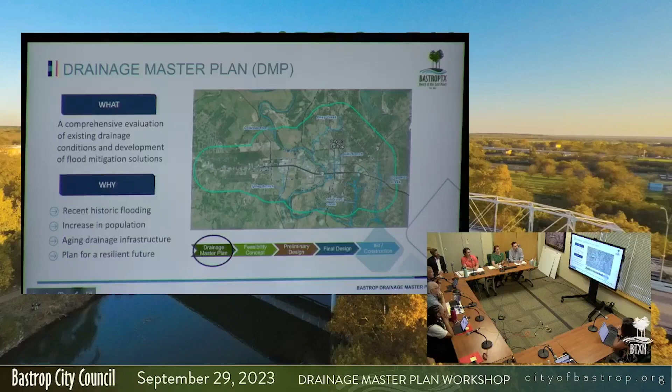I wanted to briefly talk about each of these stages in more detail. We started off, as Fabiola mentioned, in January of 2022, and that really started with data collection. One big effort we completed as part of the DMP was establishing survey for all storm drain infrastructure within the city. This is the foundation for understanding what is in the ground for stormwater, so we have a database that helps quantify and spatially ground truth what storm drains are in the ground.

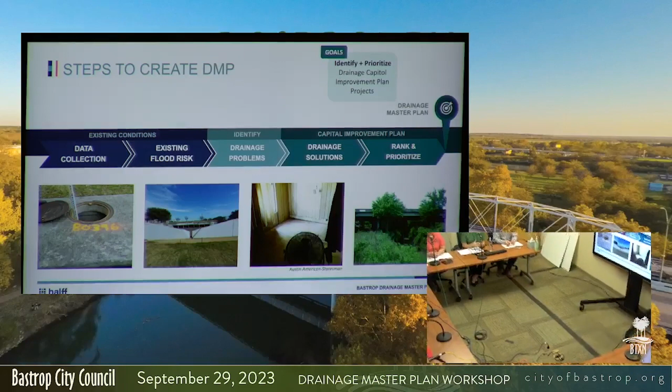With that, we did a flood risk assessment for existing conditions, which led us to identify what those drainage problems are. One of the big goals of a DMP is to identify where we think people are experiencing the most flood risk and flood problems, and then move into having a solution for how we can reduce that risk.

And that's when we move into those CIPs, capital improvement plans.

These are actual pictures of Bastrop from the Statesman. This one was after the Gills Branch flood. I found some photos taken by Halff on field reconnaissance, and this one as well, in Piney Creek. This is SH-95.

Once we identified the solutions, we also did a cost analysis to know how much funding it would take to implement them. With that, we were able to rank and prioritize them, which gives a stepping stone for the city to use in the future to continue investing in their storm drain infrastructure.

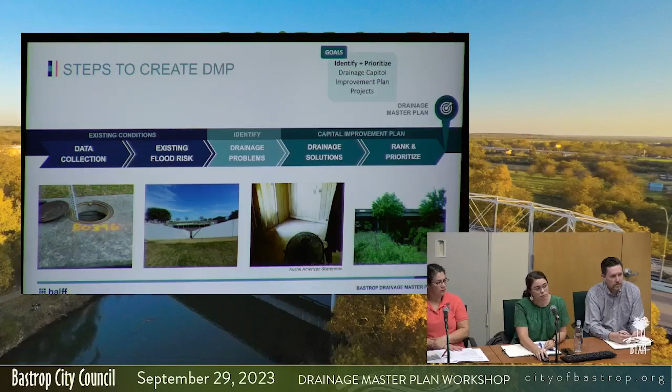We evaluated things such as structure flooding, if a home or property is impacted, and street flooding, knowing which streets are passable or cause danger to traffic during storms, as well as what people are experiencing, like drainage at their front door or window. We looked at all these components, and overlaid all the data for flood risk areas we had collected.

With this population of data, spatially we're able to ground truth the results we were seeing in our models. Just a couple things I wanted to note.

When we kicked off the project, we worked closely with the city to know what known areas were of risk and concern, the locations that people commonly call in for. We also used the resident questionnaire, which we did right after our public meeting at the beginning. We're only showing questionnaire results where a resident reported flooding in their response.

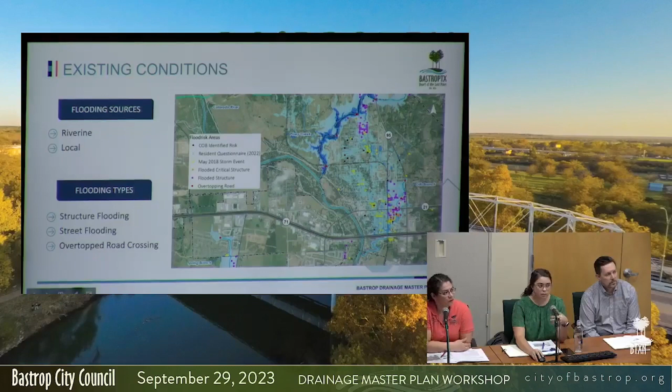Another thing we looked at was the May 2018 storm event. The city of Bastrop collected a lot of good data on which properties reported flooding, and we were able to populate that if a structure was reported as damaged and therefore a loss. All these things helped ground truth what the results were saying as far as risk within downtown or for the city of Bastrop.

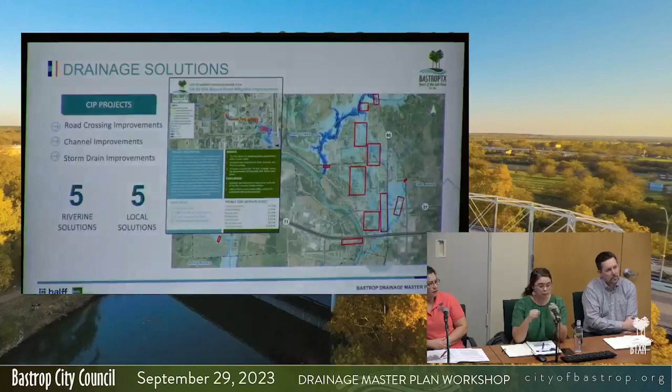One thing in the map you saw, the city of Bastrop had a lot of flooding showing as risk, which was populated by a 2D rapid assessment.

So that's really just a rain-on-mesh simulation where we take rainfall, put it on a surface, and watch the overland patterns of flow through the modeling. This is really just to see how flow behaves once rain begins.

I had a video here. This is Gills Branch in downtown Bastrop. You can kind of see, especially through here, this is a very flat area, so it does have a tendency to flow all the way down here, moving towards this culvert at SH 71 to the south. So it's just a lot of ponding.

Similar to Gills Branch, as you guys are aware, it does overflow. But even with the overflows from the actual riverine, local flooding does pond where naturally that railroad is a little higher ground. So this was a good indicator of what those general flow patterns look like.

With that, we were able to identify 16 of what we considered flooding hotspots, or more concentrated flow, to be able to discuss with the city. And with that, we were able to talk about which ones we think would be the best areas to pursue potential solutions.

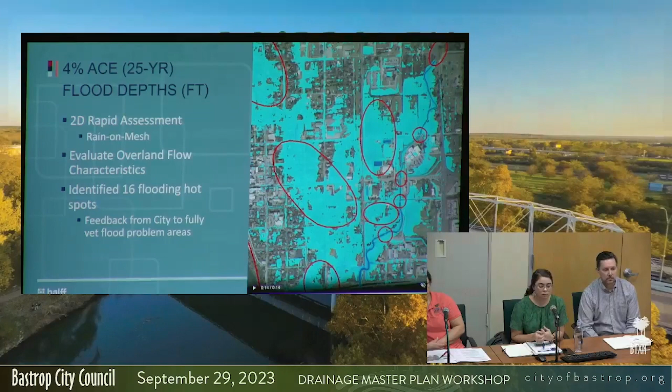So the changes to the drainage rules that happened post flood event, post large event, do have more stringent requirements in the Gills Branch area. The city did approve some, so you do have to mitigate. I'm gonna just tell you guys, this does not take into account B3 density or impervious cover, so if you think it's blue now...

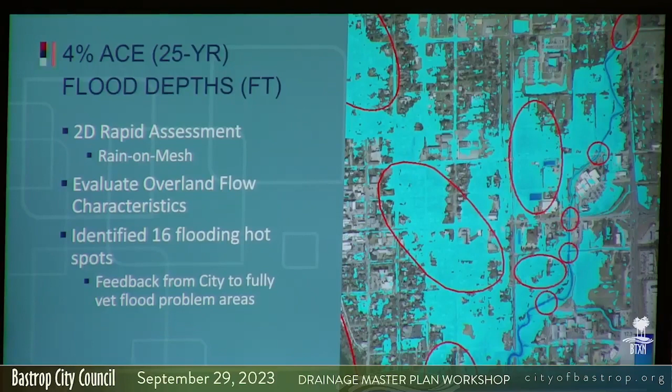So I had a couple of questions, if you don't mind — could you go back a couple of slides to the one with that one? Yeah, good deal.

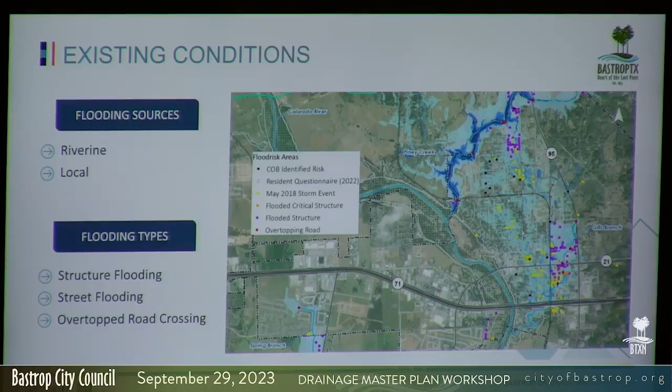And the latest FEMA report — wasn't it adopted in 2019 or 2020?

Okay, and the only reason I'm asking is because I've been here through 2 or maybe 3 of the big flood events, and I know we didn't do a very good job of maintaining the drainage ditches and pathways out of here. I think that's what caused a lot of the evaluation that was done, because things were clogged up, and so the water came up and people got stuff in their houses because of lack of maintenance. One of those pictures you showed of the Highway 95 crossing was a very good example of not maintaining the drainage ditches coming out and getting the water out of here.

So I'm just curious — the data you've got, where did it stop? What year did it stop at? Or do you have any idea?

As far as the data, all data is to date. I guess basically land use was existing — when we started the project, we evaluated the land use as existing conditions. Rainfall would be the latest and most commonly used in our industry right now, which would be the Atlas 14, released in 2019. So actually the effective maps on FEMA's National Flood Hazard Layer are accounting for Atlas 14 rainfall.

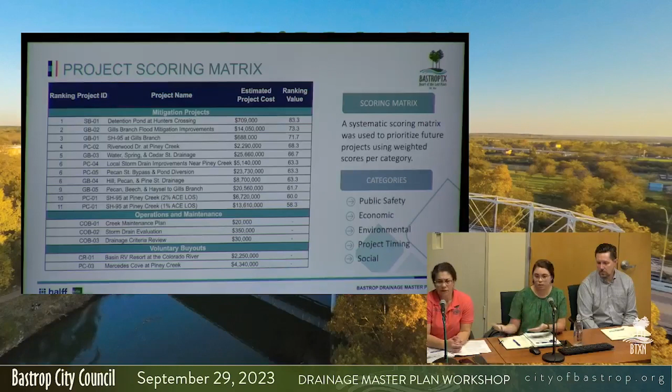Otherwise, I would say that all of them relatively stand alone, but locally drainage-wise, each of these right now is relatively connected and has one to two outfalls. So it would probably be necessary for the city to look at that systematically, starting on the downstream end and then working your way upstream. Another thing we didn't do in this list, but we could phase that out, so it's not something you'd have to address all at one time. You could do certain blocks and or streets as they advance on the transportation side or public works. So there is opportunity to approach those in many different ways. But we tried to write in the plan too, if one would need to occur for the other to see benefit, and that would probably be for a lot of the storm drain projects. They do influence each other.

Are you going to go through each one of those 11 items? No, I was not. Okay, good, because I was going to ask a couple of questions if you're going to go through a bunch of them. So the first one is actually probably the most current construction that we've had, right? Hunter's Crossing, all the other stuff is old, has been here for 100 years. Hunter's Crossing is the newest one, and that's number one on the list.

As we're bringing stuff on, because that's also where all our development is, it's all coming to that piece, and maybe that's why it scored number 1.

Is that detention pond creating a new pond at Hunter's Crossing, or making the ponds that are there deeper, or a combination? We did look at that. Right now, with the structure in place, the weir does see overflow at Hunter's Crossing. So we looked at resizing the weir structure to help flow pass through a little faster, and therefore mitigate that road crossing. We did look at adding volume to the pond itself.

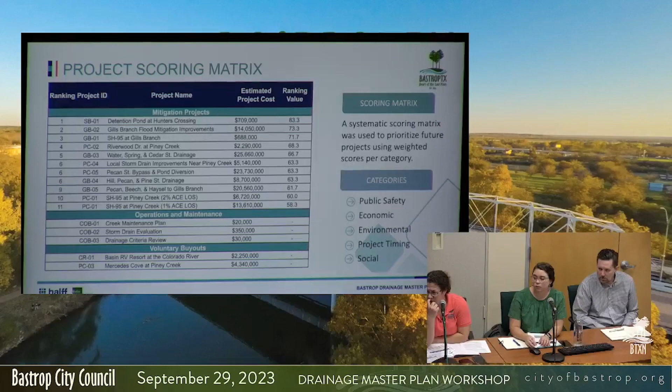Because I think a lot of that water too, and Fabiola, maybe you can help me with this, doesn't it come from the detention pond at Burleson Crossing and then go across the highway? Or am I wrong with that? I don't think so. I think the detention pond at Hunter's Crossing is just to address the flooding issues at Hunter's Crossing, right? Correct. Okay, I thought they were connected. Burleson Crossing detention pond was creating issues going across the highway, but I could be totally mistaken with that.

But I think that being number one on the list, and knowing that's where all the development's going, we should try to fix that. It should be number one if that's where all the drainage is going.

Someone did already call and ask how we analyzed it. We did analyze it with existing conditions, so it does not account for any additional development that could be ongoing upstream of it. With that, we would have to probably reevaluate what that looks like at the crossing.

So that concern, since we're just talking existing, and Sylvia brought up future, do we need to study, amend, and look at parts of our B3 codes that could contribute even more to potential flooding? Are there places we should look at more closely in the B3 codes that could make this worse?

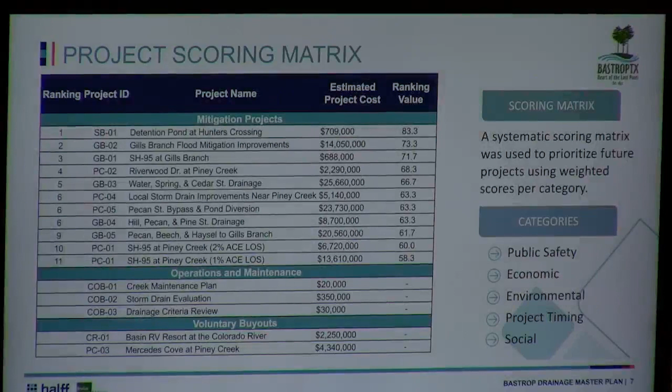The issue with Hunter's Crossing becomes they had capital impact fees as part of their public improvement district, and those commercial properties are paying the brunt of that. I don't know that they can sustain any more. And legally, if we can charge them anymore, they've already paid their fees and they paid to highest and best use back then, so they're sort of caught up. This is going to be our expense.

I had a question again on, and I'm glad you asked about the density and what we currently have now, so we definitely need to look at that as we're rewriting pieces of the code, what we're doing and creating more pavement and more impervious cover. On the Highway 95 piece, can you go back to the map again?

I guess that one will work. At where Gills Branch starts at 95, and that's all the, is it all the dark blue? Is dark blue Piney Creek? Oh, Gills, okay, right where your cursor is. So there's a lot of vacant land right there. So if there was a detention pond there at the beginning of all this water, where it's starting at the bottom of that hill, would that help? I doubt if you took that into your evaluation of everything, but would a retention at the beginning of all the water starting help with the downstream water?

So we actually had, not as part of the DMP, Halff has been involved pretty intimately with the Gills Branch watershed. So back in 2017, I think, was when we first did the FPP, that's the flood protection plan, and we evaluated both Piney and Gills Branch.

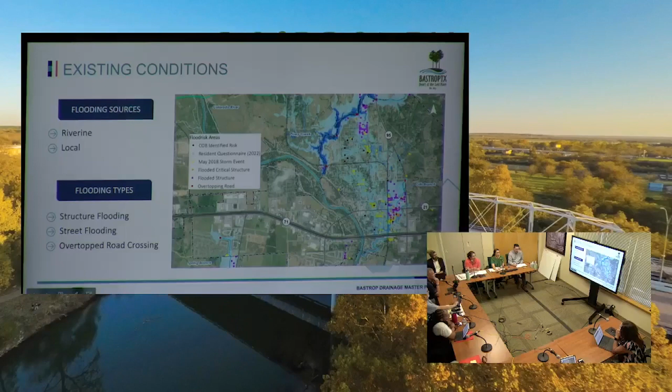I guess I'm not sure what metric I would want to use, but at the same time, I might want to look at additional metrics, like number of structures flooded, or some other way to look at it to see if there is another logical way to order it.

How would one get that data? Yes, it was part of our package, so let me know if you need that again. But essentially, you'll be able to see how each were weighted.

For example, public safety was weighted based on frequency of storm events and flooding risk impact. Similar to economic factors, there were just ranges. We could always change the criteria of what's being influenced or decreased, and change the values of those.

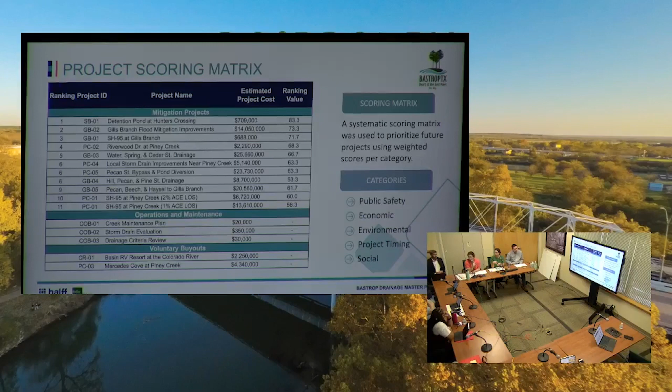When we were using the criteria, what we were trying to do is based on the International Institute of Asset Management, which uses the triple bottom line approach recommending safety, environmental and social, and economic value. We tried to use that as part of this project. The only thing we added was project timing, to see if we could combine with other projects.

I can't recall, but did that package also include information from the 2017 study and some of the recommendations from that study? No, we did not include that.

The master plan may mention it, but it didn't include the package on that study. If you want that, I could try to get it. I think it'd be nice for council to look at it and see what had been discussed before, and to make a determination of whether or not it's something we want to continue to consider, at least from a study standpoint.

And this email from Ann that you're referring to, we got one for this meeting that was just a copy of this presentation. Is there another one I'm missing? Yes, I thought she had sent it to you last week, the Drainage Master Plan report. It's on the shared drive, the council shared drive. I pulled it up this morning, yeah.

On your larger items up there, number 2, number 5, number 6, maybe number 9 too, there's multiple things identified that accumulate those costs, maybe 5 or 6 road crossings. I can use Chestnut Street as an example — this crossing was calling for bigger concrete structures to get water from one side of the road to the other.

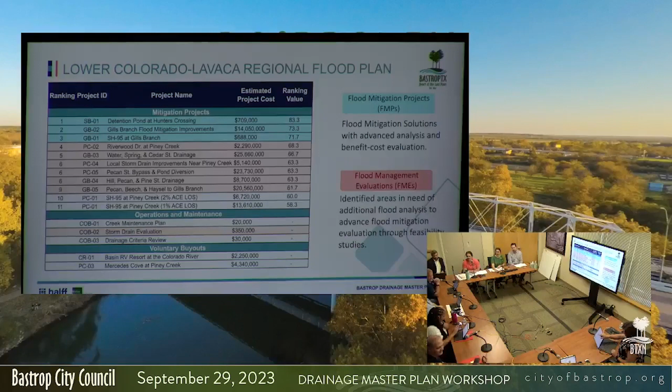Yes, so with that, we did want to take some time to talk about the drainage project. NewGen did a cost analysis to look over what potential funding would look like in the future.

All right, good evening, Mayor and Council. Matthew Garrett with NewGen Strategies and Solutions. I was able to present at your town hall eons ago, but NewGen's not a stranger to Bastrop. Chris Eckert has helped you with water and wastewater for some time, so I'm honored to be here in his place. I do a little more stormwater than he does nowadays. So you sort of saw $128 million worth of projects in '22 that we think are probably our problem.

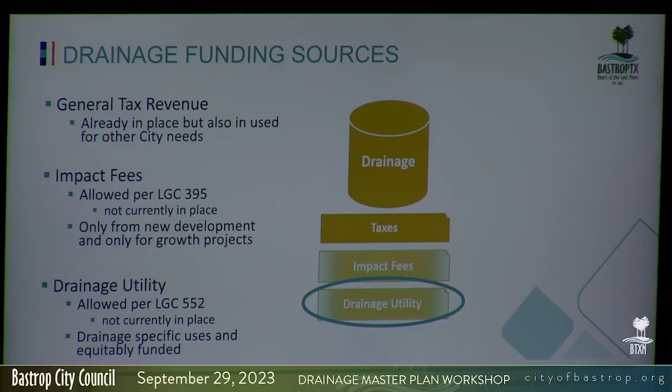It's under current conditions, and you now have a challenge of deciding prioritization, also how to fund it. You clearly have more than one means to fund this. The city coffers have a lot of channels coming into them, but generally those are general tax revenues.

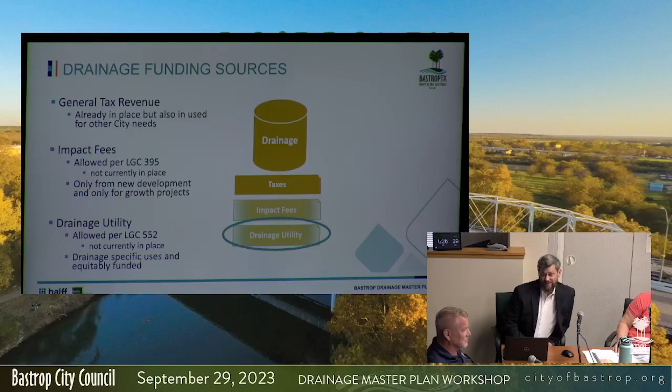You could do an impact fee on stormwater. It is eligible, though we haven't proposed that. Alternately, you could implement a drainage utility. That's allowed for under Texas Local Government Code 552. And so the cost of services that we included are all eligible. So it's governed not only by the statute that allows you to create this utility, but also what you spend the money on, so that the fee stays a fee and is put to those uses as an enterprise fund.

All right, so very simply, there are operation and maintenance expenses. I think we talked a little bit about vegetation at one of your major waterways already. Maintenance of your waterways can be very important and helps get the water where it needs to go. So there's an idea that you need to do more of that. Today, as I understand it, you have that being done through your streets department. So we were able to pull from staff the estimated work effort from that group that could be, not that it has to be, allocated or included in this potential utility.

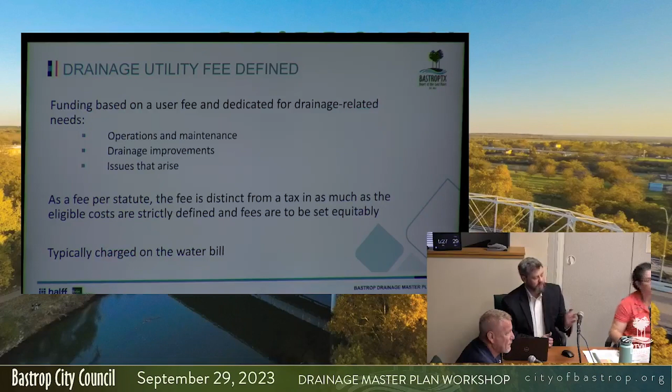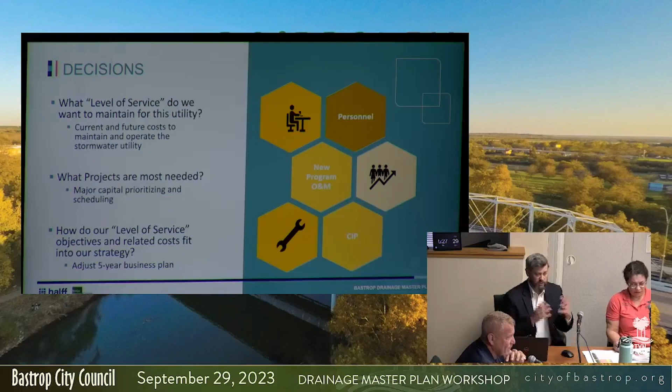Additionally, we have the drainage improvements, a pretty large stack of them there, $128 million to look at. And we looked at a couple other items related to additional maintenance needs in the future. So again, if you were only going to fund those capital projects, you have a big enough challenge, given either the current property tax limitations that you have on the city and the druthers of your residents.

Additionally, we looked at the existing personnel, we looked at those new programs, and we had to do a metered approach because there's no way, I believe, to put a tenable, even drainage fee out there that could fund a quarter of what you're doing in year one. So we understand that this is a big price tag, and that's going to have to be phased and funded over time.

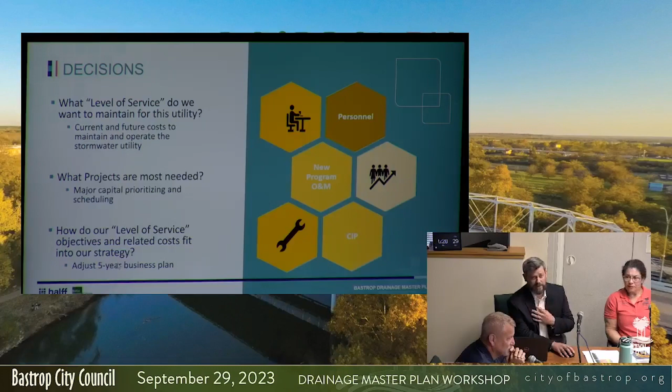So again, we can talk about adjusting the 5-year business plan. It's certainly not mine to set the course for your project priorities. But for the items that I had collected, and that's about 25% of your streets using the 2023 budget, it did have a small administrative overhead portion, which was about $40,000. These are all subject to inclusion or exclusion at your preference.

But if we included that and we included some additional staff, we have some professional services, because we're going to have these projects, we're going to need additional project management, I believe. Fabiola is the contract services we included in there. Additionally, there are some maintenance plans that should be put into place. There are some costs in setting those up. So those are baked in.

That is about $660,000. So the Halff team put together an impervious area analysis. That's how I came up with this up to $6 amount. This is based on your revenue potential, based on the residents and the impervious square footage of your commercial properties.

If we were to fund the capital, and you have this in the report, maybe an appendix on the shared drive, I believe, you'll see that we only got the first 2 projects for $10, because we had plus or minus 15, 16 million there. If I was to debt fund that, and my rule of thumb is $1 million of debt is about $75,000 a year, so if I'm going to generate enough to make those debt payments on a 20-year note, you would need about $10 to fund just those first 2 projects, if solely from this revenue source.

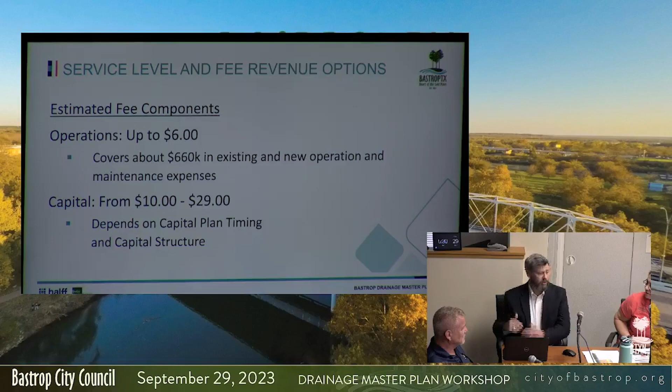So to answer your question, if we were to fund operations, this is a new conceptual utility, setting aside an enterprise fund, just like your water and sewer fund, with dedicated revenues and dedicated expenses. If you were to categorize a portion of your current streets budget and a small portion of your current administration budget, and add in a new project manager and another maintenance worker...

...you would have an annual budget of approximately $600,000. To fund that, with our known billing determinants, our ability to bill based on every home having a fee and commercial properties having their ratable fee, that would amount to about $6 a month.

And how did you determine which properties were eligible for this fee? The statute limits you to your city limits, with maybe a few exceptions for Edwards Aquifer Recharge Zone, but we didn't take that as an exception because that's your service area. Well, but it's not our water service area. No, sir, not at all. The Halff team looked against your appraisal district records for those in your taxing entity, and additionally, spatially, they took the footprint of city limits. I didn't do the GIS work, and I don't think we have that staff here tonight, but we did try to limit it to your potential billing area and wouldn't have extended beyond that.

So for people in another water service area that don't get water from the city of Bastrop but are inside the city limits, they would just have a bill for $6 a month for this. They could also pay annually - the City of Houston does annualized bills. They could do quarterly bills, and I think you have a solid waste service you could also use. This would be another line item potentially on their water bill, so you'd have maybe a small administrative service fee to those entities as a result.

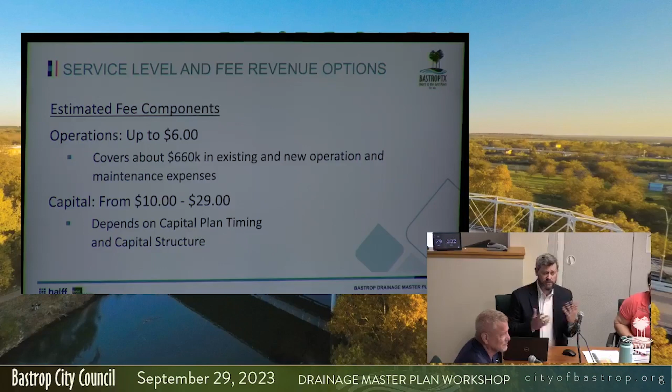And perhaps it wouldn't add anything to your current administrative service fee because it's just adding one more row, sort of a set it and forget it on every account. That's subject to, I guess, we didn't go that far - we're very early in feasibility, but great question. We understood we had a means to collect this revenue.

So again, that's $6 if we were to bake in everything I was given as an opportunity to include in this. And then for capital, another $10 to $29, potentially. Again, those are stretch numbers, I know, but we did have a big daunting CIP in front of us.

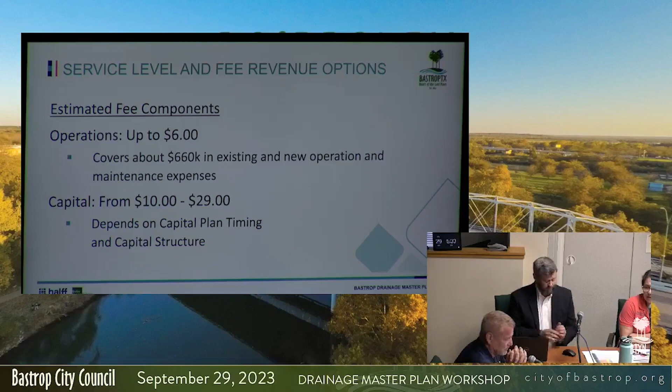And again, the master plan - no master plans I've worked on have assumed the staff is going to fix it all in one year. So that's not to say you should, certainly.

And ma'am, did you have a question? I do. So the $6 a month is only going to help us with existing maintenance and operations, right? Yes, yes ma'am. So in order to achieve the actual projects, is that $29 including the $6 or $29 on top? So that's another whole - $35 to get a third of the...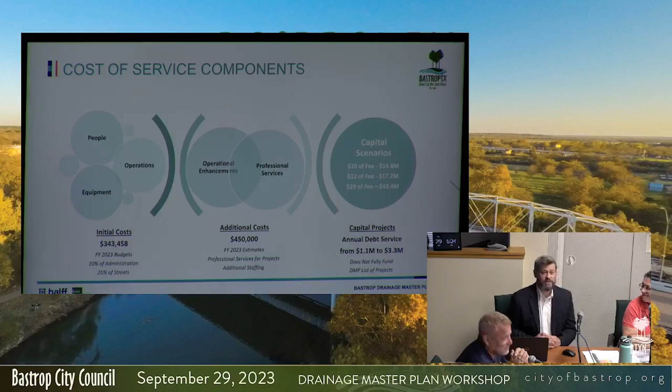Not a proposed solution, of course - this was feasibility. We would certainly look at comparators around you and talk about what is a reasonable figure for this, and I know you would all wrestle yourselves with that very question. Which is my point about development agreements that did not include annexation will now bite us in the butt for the next 20 years.

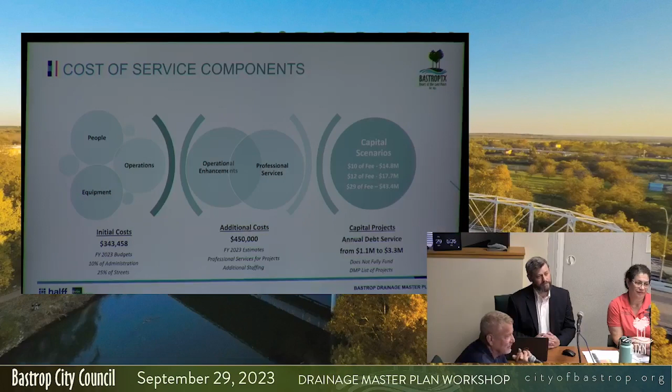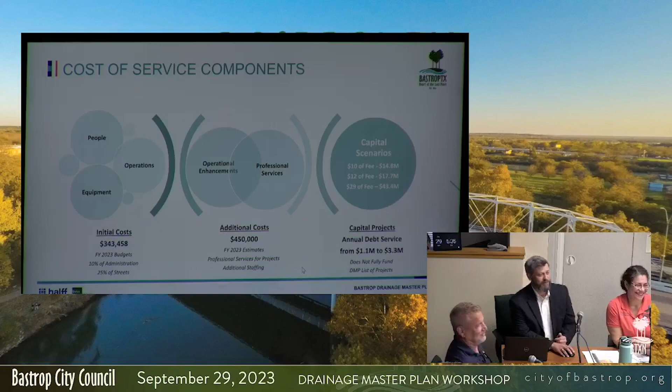I came in the middle of all this. Yeah, I feel your pain. I started my career in government, and I've been in city's shoes before. It's not fun - so, new challenges.

So this is really showing you, hopefully simply and visually, what a $10 component for capital alone would get you relative to those projects. Again, I just assumed the priority ranking as originally assigned, and you'll see that $12 of funding. The difficulty with debt funding is you do it and maybe you execute in 3 years, but for 17 more years you're paying that same note.

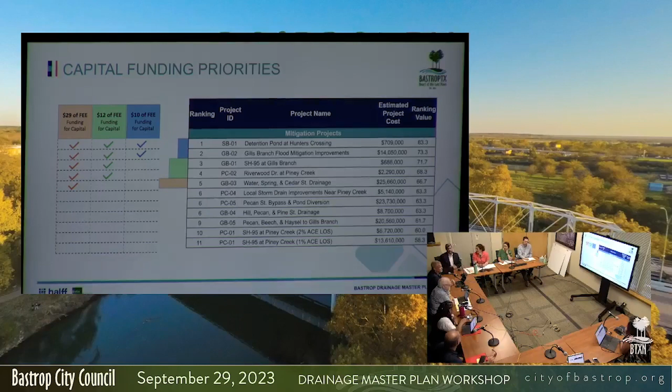And so you can't compound these and ultimately stack them on top of each other with stacking the relative revenue. Now, this doesn't assume a lot of funding or grant opportunities or developer matching. This is not a bleak forecast either. I think it's very realistic. If anything, it's a little shy, because as the gentleman pointed out, we haven't inflated these costs, and we've seen some substantial inflation. And Councilmember Lee, this

proposal is also a fee. It's not an impact fee to new development, the way you saw the transportation impact fee. And so we may want to do a combination of both of those things to keep the upward pressure off just the city limit residents, so that it includes all new developments as well.

My concern goes back to the same thing that my concern was for the impact fees. You were asking residents in those areas that have paid taxes for years, some for a lifetime, to now pay for the problem that the city's created, and for growth. We're having to pay now for growth. And it's a fee where we can't control the amount of rain, right?

And so a fee is usually you're paying a fee for some type of service. So my house may have far less impervious cover than my neighbor's house, but I've got to pay the same $29 they have to pay, and they're causing more of the problem. So where do you balance that out?

I had a friend the other day that called and asked to borrow $30. They needed $30 more to pay their rent, and that's $30 that they won't have to pay their rent. True story. So we're just nickel and diming our residents.

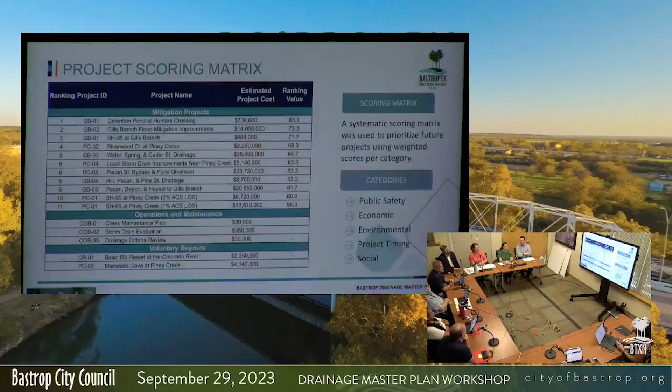Help me quantify like a 25-year or 100-year storm event. So, 10 inches of rain in one day, 20 inches of rain, help me quantify it in something that might make more sense. Well, we've also had 500-year floods in the past 10 years probably. It was designed for a 25-year flood event for some of the engineering, so I'm contemplating how much rain is that, over what period of time?

So you're quoting my memory now, it's Friday afternoon, guys. I would say, I think the 100-year - and it is in the DCM, or the storm manual - I think it's 12.4 inches in a 24-hour period is your max storm event for a 100-year. I don't know the 25-year off the top of my head. Okay, so about a foot in 24 hours is 100-year. That's true, yeah.

And rain doesn't really work like that. So is that spread out over a 24-hour period evenly, or because usually what we get are flash storms where we may get 2 inches in an hour? So we look at all of those scenarios.

For a 24-hour storm, we evenly distribute that rainfall, but there are other depth and duration factors considered in those frequency curves, so it can kind of vary. In our modeling we look at anywhere from 15-minute increments to 3 hours, and the depths and intensity can change through those curves.

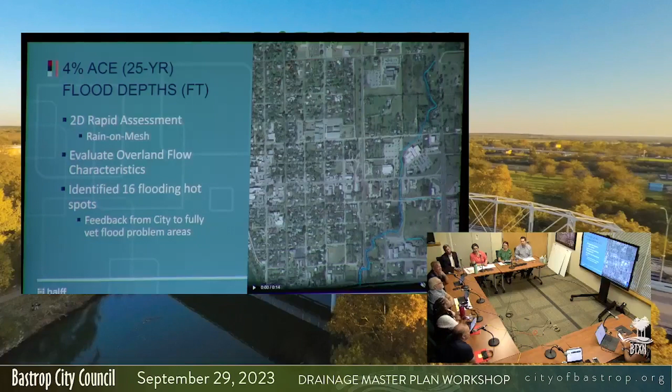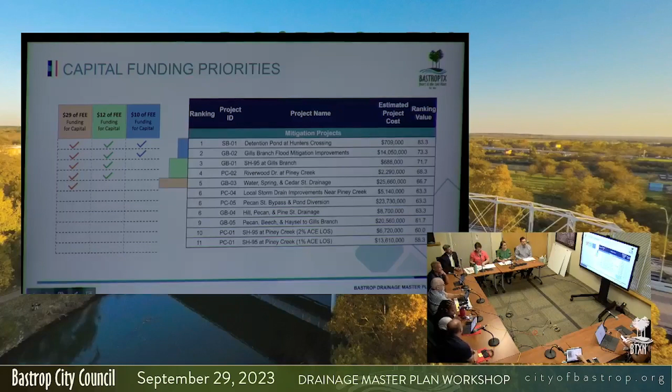So of the cities we were compared to here, do we have any idea how we compare to them in actual terms of flooding and infrastructure? For instance, Taylor, you have here at $4 — well, I think it might be a little under $4, maybe $3. I'm sure that $3 isn't fixing and saving all of their city from flooding, but I wonder, in comparison, how flooded are we compared to Taylor at $3 a month?

It's going to be a combination, because a lot of cities deal with their stormwater as part of their street budget — when you're building a street, you're capturing the drainage system that goes along with it. We haven't dealt with it that way. It also depends on how they're building and borrowing. If it has a $3 fee, chances are a great amount of that debt is funded by the general fund, or they have a street tax or some other pot of money. Generally a fee that low is more pay-as-you-go.

They've probably put that $3 fee, much like the $6 fee, into maintenance and operations. That $3 fee isn't big debt, it's not fixing their drainage issues — it's mostly maintenance and operations.

So what are our other funding options? I don't know that we ever got that far.

We showed a few — not to get on my soapbox, but you mentioned impact fees, and I've heard about growth, though I don't know all of Bastrop's details. But if growth is going to have a substantial impact, impact fees aren't saddling current residents, only growth. I've done these across the state — I think they're vital. We most recently helped Houston update theirs this year.

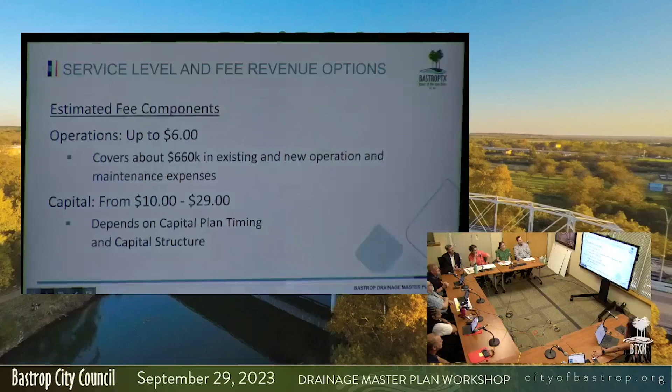Okay, going back per Fabiola's suggestion—I kind of glossed over or skipped through a few things, my apologies. So, very simply, I wanted to talk through the impervious area analysis, and I'm happy to speak to it. Was that the intent, Stephen, or did you want to take these?

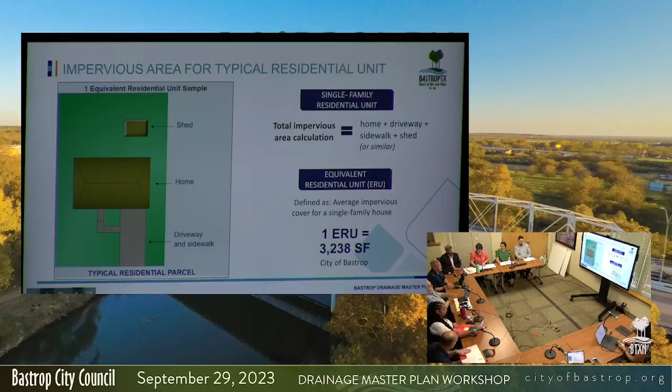Other than single-family, though, I wanted to show you how we do the non-residential. Non-residential doesn't mean, and I should change that, it's non-single-family residential. It could be a residential use at an apartment complex, but because it has multiple units and because it's not single-family residential, we would look at their lot, and let's just pretend this was that same apartment.

Here's a building, here are 2 points of entry and exit, and their parking lot. They have 10,000 square feet. Using this 3,238, pretty simple math, it's 3.1 ERUs, or equivalent residential units. And so this, and this may not be representative of an apartment at 3, would pay 3 times that of your resident.

That said, of your residents, I think we had about 3,400 at the last time I sampled, and our ERUs represented from the non-residential group is 6,800 plus or minus. So that's convenient math for me, that's about 60+% of the revenue stream from this fee type would go from non-residential, and you could contrast that with your property tax percent yield from any customer class and see which is most advantaged to your residents from that perspective.

So for instance, if they paid 50% of the property taxes and they only paid 30-something% of this, the same dollar yield would come at a lesser cost to your residents.

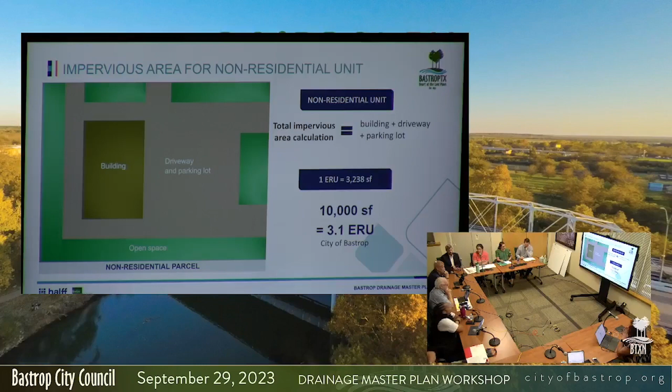Just food for thought. Now, that's one good thing in the B3 code - it encourages you not to overpark, because that's all runoff.

So this is sort of nuts and bolts again. We back off about 10%. Our stats from a few studies say commercial is going to have 10% attrition, turnover we won't collect, and they're a big part of our revenue stream, so we want to account for that. Additionally, the city has given us no direction to even start the utility, so we haven't started down the path of discretionary exemptions, which are allowed for in state code.

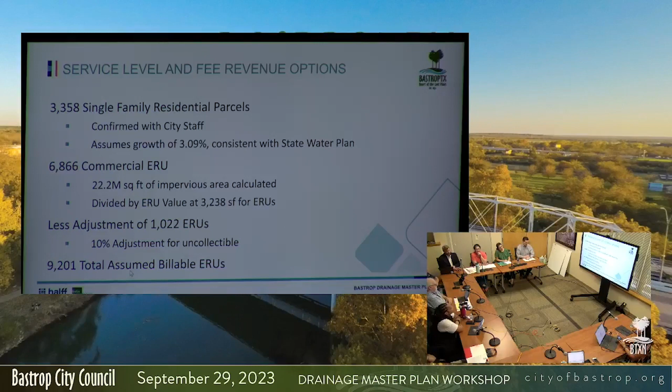So that said, we think you have about 9,200 billable units. That math does feed back into all of those original dollar figures of revenue potential, which is in the report. That report's dated now by a while, and its half-year implementation in year 1 is notably less than year 2 because we anticipated starting this midway through the current fiscal year, originally.

And so again, as stated, these cities don't have your same topography, they don't have your same residents. I can tell you from experience, we helped implement Boerne's. Boerne purposed to have a property tax component and this revenue component. They did put both streams into a dedicated utility, but I can tell you they're not funding, I think, as you pointed out, everything they need from that.

Additionally, you have a lot of roadway projects that include drainage. Some cities actually purpose to maintain, if it's a part of a major roadway, we're going to go ahead and do the curb and gutter as a part of our street infrastructure portion of the tax rate. So not only do you have a lot of decisions about the priorities and the fee potential, you can also slice and dice your various revenues a lot of ways to accomplish this end wherever you land on a priority.

I think that's a very good point because we are working on streets too. We do have a plan for that. How feasible is it, as we repair our streets or go through that process, to upgrade our gutters and drainage that way using that half a cent?

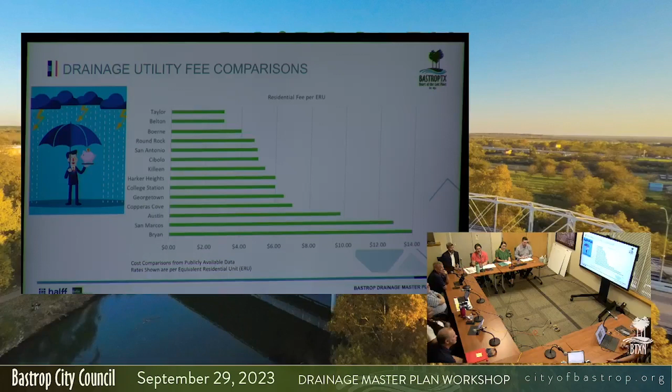We go to a complete relook. We look at maintenance real hard first. We get past November 14th, hear what the folks at the tables have to say - do they like the density, do they want to continue down this path? And if so, this is the dollar impact it's going to have.

I think our residents need to understand, just like with the transportation impact fee, this is a potential cost that we're looking at if we continue down the same road we've been on. This is the price tag.

Because we're growing, we're going to become more dense, so you ask that question. If they say, well, no, I don't want to go down that path, then we say, okay, well, we're not allowing any more development. I think you have to have the real hard conversation about development in the areas that are already problematic in the core. That's like the first question that we need to get real clarity on.

But the second area is like the Hunter's Crossing area with 2,500 units potentially coming. I think you have to look at an impact fee. I think they have to pay their effect, and an ordinance amendment similar to what we have for Gills Branch, that you should have a net zero - you shouldn't cause any more issue. But again, that's an easy one - we can get that ordinance on the books by November. That one's not a hard one.

The issue becomes, okay, so we fix Hunter's Crossing, let's just say, because that's the first one on the list. It's everything else down upstream from the county that's getting built that's going to have an impact anyway. So it's more than just passing a $35 bill onto the residents. It's a much bigger conversation than that.

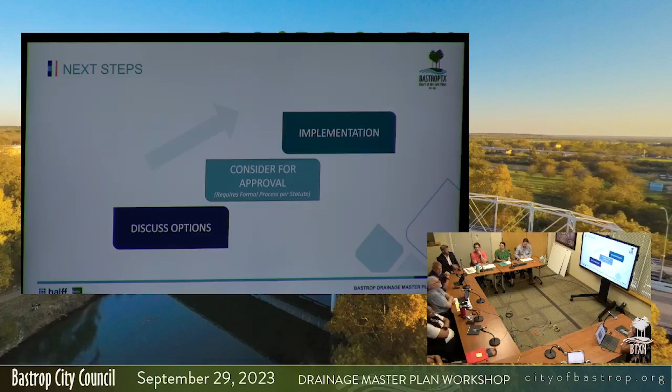Well, y'all did a wonderful job. Thank y'all so much. You are awesome. It's not you. It's us.

Does anybody have any questions for our presenters? Any further questions other than making the pain go away?

Not sure. I'd like to see, and I mentioned this, and I saw Fabiola writing it down, but if we could get on one of the maps the dollar amounts for each of those things, so we could look at it on one picture and have a dollar planted on the crossing here or wherever it's at, and I think that would help us.

Robert, do you guys have the GIS layer you can send to them? He has the layer. Okay.

So I think that'll help us have a discussion about it, and then help us prioritize where we want to spend money and how much it's going to be to get stuff out of here. And I like the rating system you used, that's great, because that's going to help us identify what's the worst and put that at the top. So thank you for putting all that together for us.

Councilmember Crouch is absolutely correct. The more well-informed we are, the better.

Yes. Also, if there's any way, I know this would be a big ask, but if we overlay the street reconstruction with the drainage, then that's going to create some savings. I would think a really nice chunk of savings, in those areas where we're not catching anything. Everything's running in bar ditches.